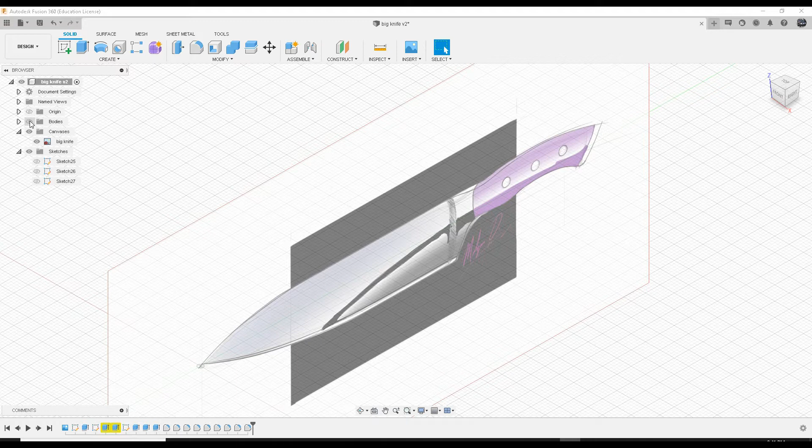Sketch it out, let's take out the bodies. Okay, so this is the sketch, right? And all I did was do one view, and we're just gonna do a simple knife.

It's not gonna be all super complicated or whatever. Let's get started. I have the sketch here. I brought it in, calibrated to roughly the size of the knife in real life, which is about 14 inches long. I memorized most of the dimensions, so we're just going to do a rough version.

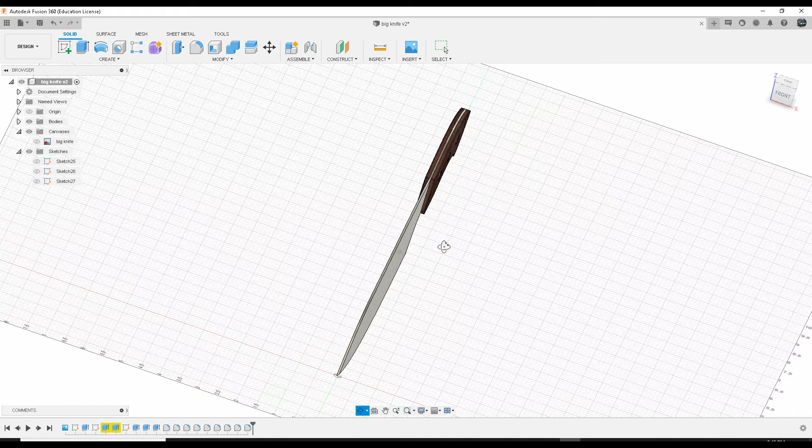Let's get the bodies in. So this is what it looks like without the sketch behind it. You see, you got wood grain, handle, and everything.

We're going to start from scratch. Now I'm going to show you how easy this is. All right, let's get the knife in here.

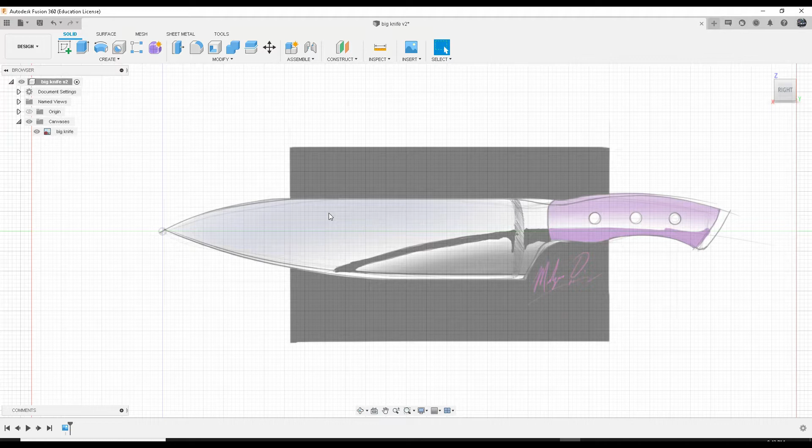First thing, if you notice, I have the start of the picture right at the origin of the grid. Create sketch - it's going to ask you to choose, select a plane or a planar face. We're going to choose this one since we're already in the right side view.

Going to go up here, give you plenty of options to choose from. We want to choose fit point spline.

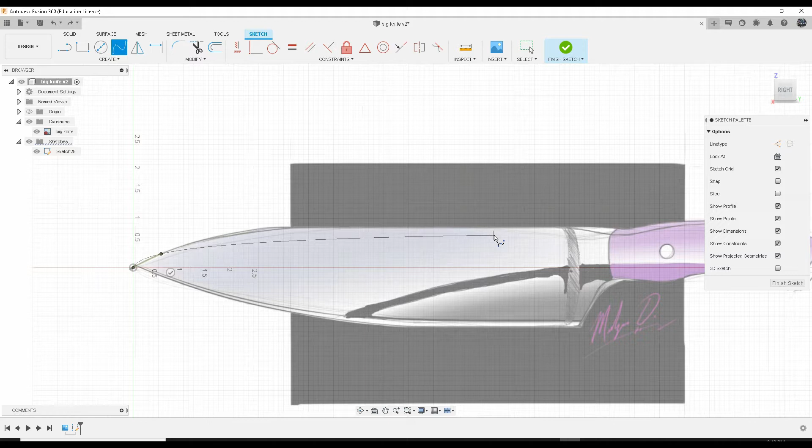Now, here's the thing. When you're creating a curve, you don't want to keep doing points. It's not going to make the sketch look good, honestly, if you do it like that. You want to simplify, keep it simple, right?

So what you want to do is just put the points at the arcs, like the highest and lowest points of the curves, or arc points, or what I like to call them. So with that, you just click along.

Using a Windows 10 computer, so my shortcuts and hotkeys are going to be according to my operating system. So left click, press enter.

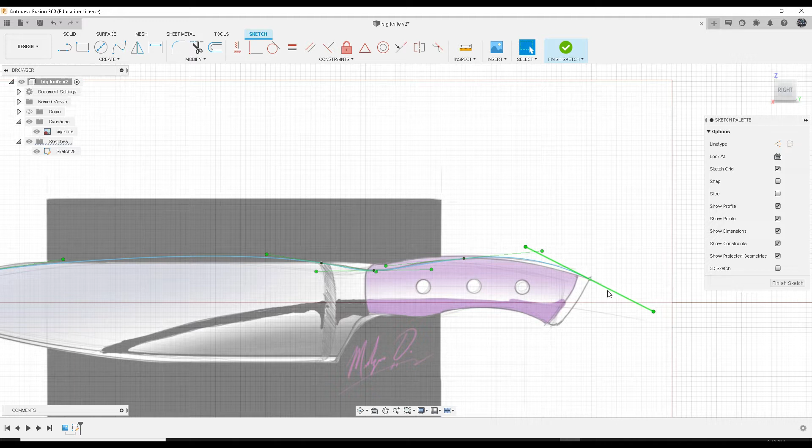Go ahead, click on each point and it will allow you to manipulate it. You have what's called curvature and tangent points too, and you see that pop up along with the curve. When you click on a point on the curve, it'll give you the option to manipulate it.

If you click on a point and press M on the keyboard, it'll give you the option to move it around and stuff like that. You'll see the drop down menu, and so on.

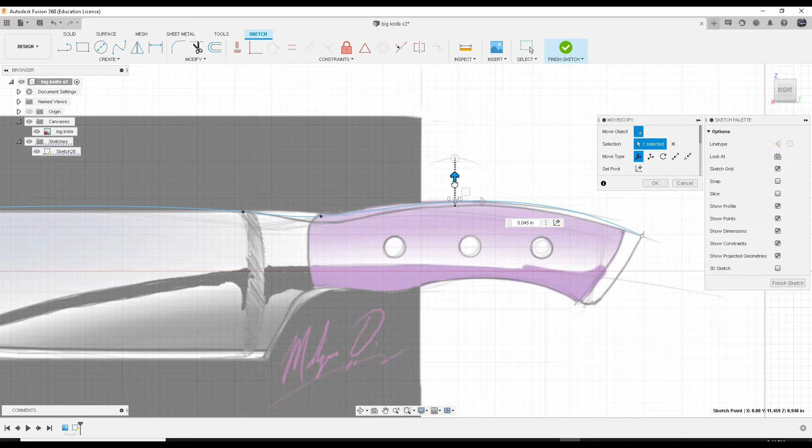So we're just going to get it close to the drawing. It's not going to be exact. We're not doing a CAD CAM type of deal where we're going to be machining this on a CNC or anything like that. We're just trying to keep it simple, get it straight to the point.

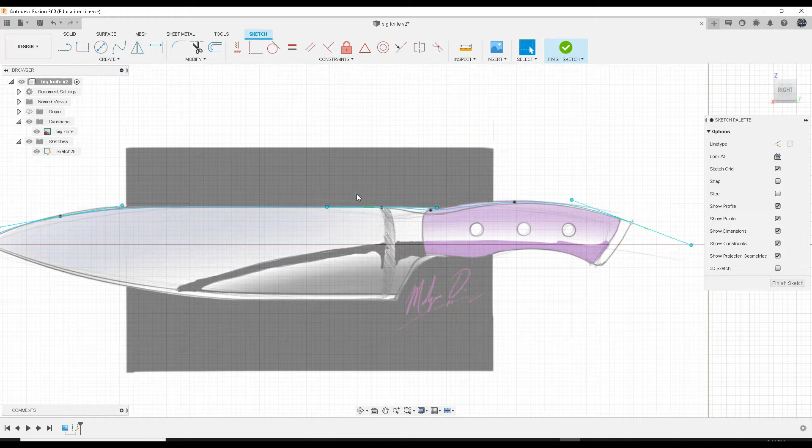All right, go ahead and press enter. Hopefully the storm outside, you can't hear it too well. Hopefully not, it's banging out there. So we're just going to keep going.

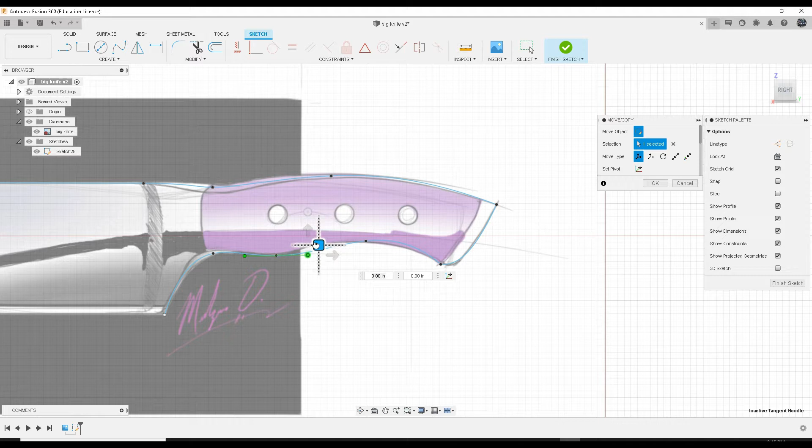You'll notice for a few moments I'll stop talking. All I'm doing is setting up the curves and keeping it simple, using the same principle I touched on a few moments ago. You want to minimize the amount of points you're using. It's going to make the object look better in the end. You'll see what I mean once we get this going a bit. This won't take long, I just need a few more minutes of your time here.

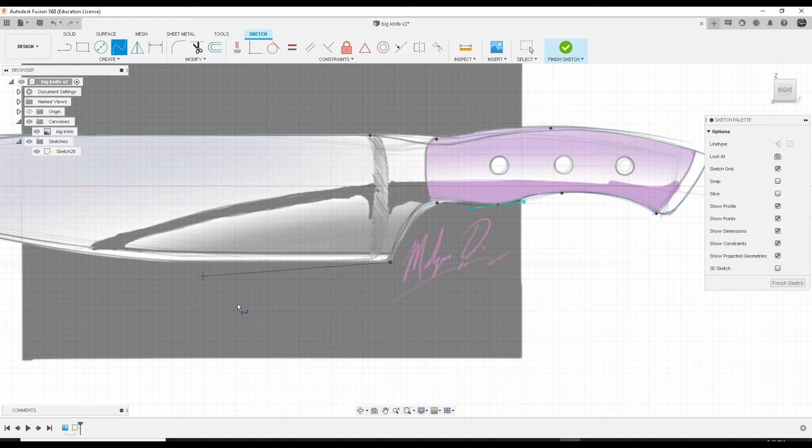There we go, press enter on the keyboard. Now what's going to happen, I'm going to show y'all something. You left click on a point to continue where you left off. You go to move it around, and what's going to end up happening is it's going to allow you to snap to the next point. It could be this one, this one, or this one, but we want to go to the end to establish the body.

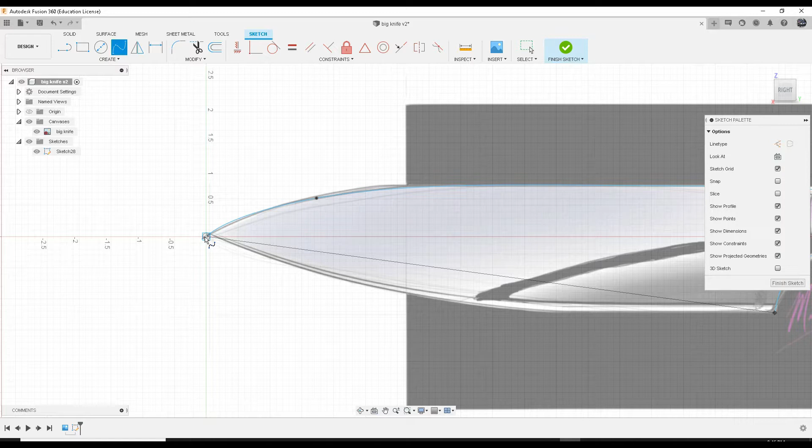I'm going to show y'all something. You hover over to that point, and it's going to kind of snap to it. It'll even drag you along the axis. Go ahead and snap to that origin, that's where we started. You can left click the green arrow, or just press enter. I'll just press enter, it's easier.

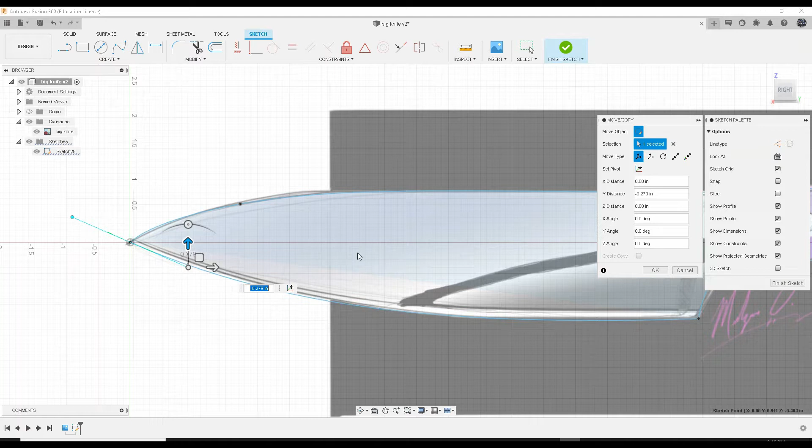The more you work with this, the more complicated your shapes and objects get, the more you'll want to use the hotkeys, because you don't want to keep clicking on the screen. It can get quite confusing.

So once you hit enter, you see if you hover over the object, it's going to turn blue. This lets you know you have a body. Go ahead, click finish sketch.

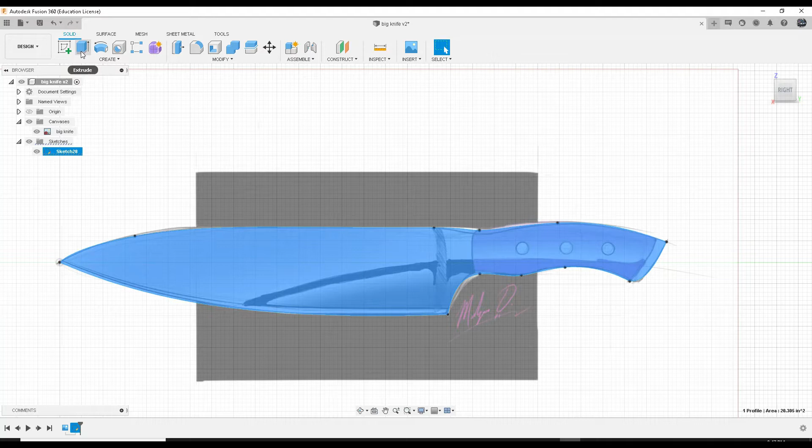Now we're going to establish a thickness. So you left click, go up to extrude, click it, go to isometric. You click the little house icon above the cube for the different views, and it's going to take you to isometric. So we want to establish the thickness for the blade, using rough measurements since we're not trying to put this on a CNC or anything like that.

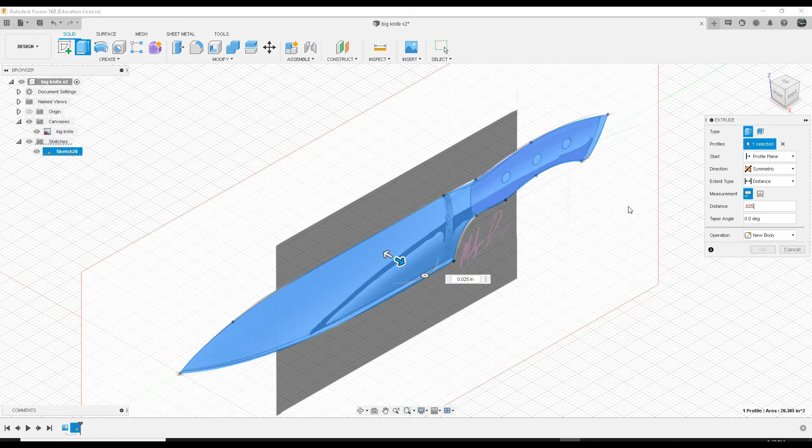Go to direction, click symmetric, go down to distance. You want to type in 0.025, 25 thousandths of an inch. Press enter. Boom, you have a new body. This is literally the thickness of the blade.

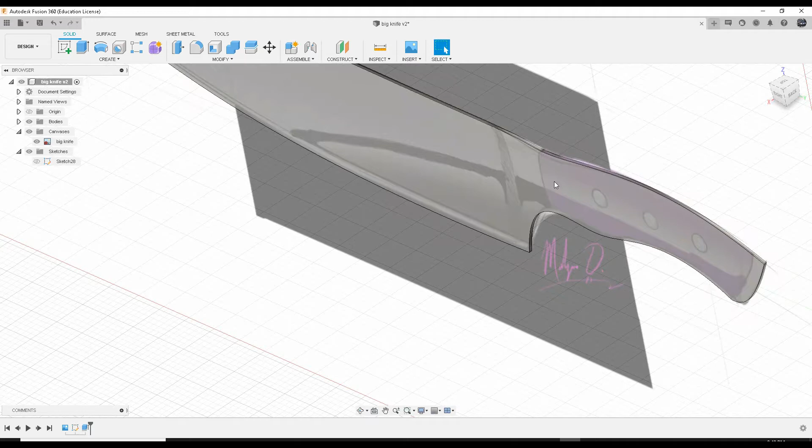Now what we're going to do, and I'm telling you, it's really this simple, we want to draw on the face of this body. When you create a body, it has different faces, so you've got one, two, even three here, and one on the other side. We're going to click on his face. So let's go back to right side view, click on his face, create sketch, and it's going to allow us to draw on his face.

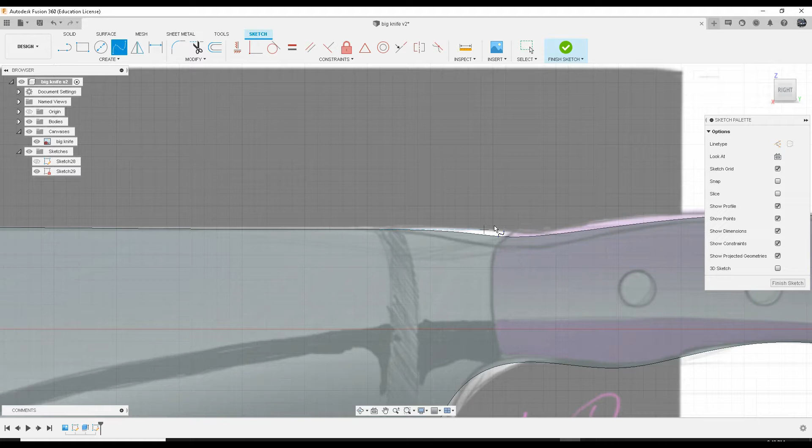Go to fit point spline. When you hover along the curve, it'll let you actually click on the curve. So you want to click there, go down, and it's going to snap right into it. Click, and then when you click again, same option, it's going to let you wiggle this around, confirm it, or you just hit enter.

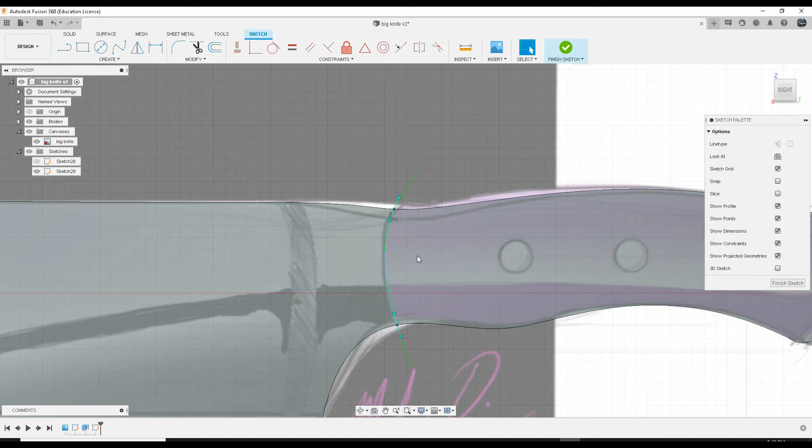Same thing, we're going to manipulate the curve, staying somewhat close to the picture. There, I drew it, press enter. Move this all along, there we go. Same, finish sketch. There you have it, so now you've created two faces on the same body. This is the handle we're working with, so we're going to translate this to the other side.

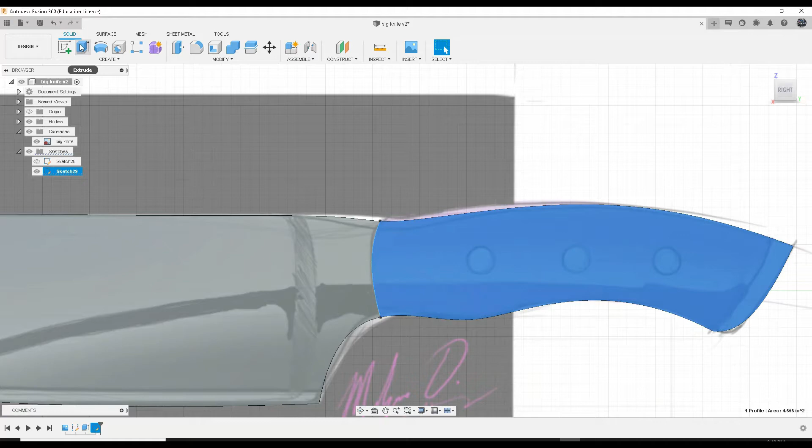So to translate it, what you want to do, well copy it to the other side. Click on this face, just left click it one time. Go to extrude, flip it around. And if you use this arrow to drag it, you kind of get it started, right?

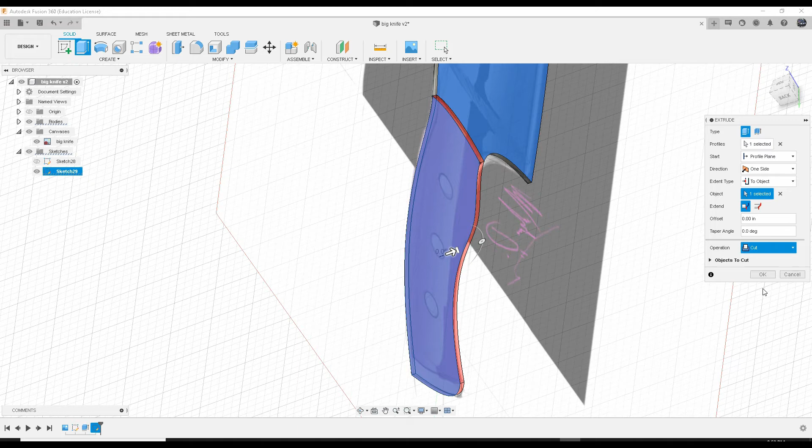It gives you an idea of direction and the direction it's trying to go. Now if you look, it's in red. That means it's trying to cut it. You don't want to cut it. We're going to establish the distance, extent type to object. Click on the object.

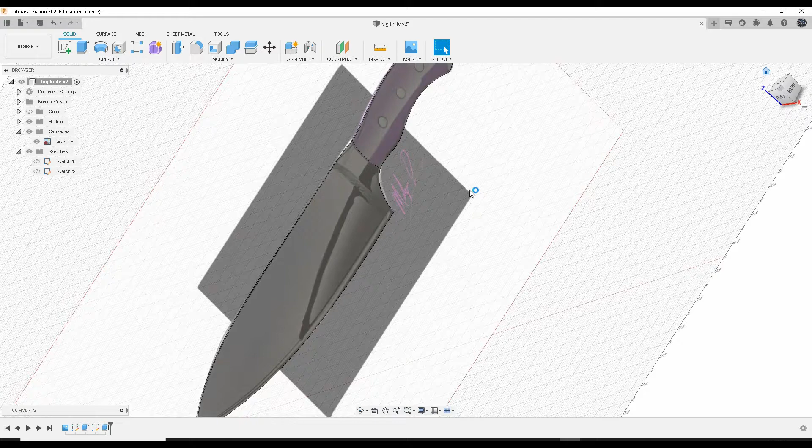Instead of cutting it, you want to go to operation, new body, press OK. That's simple. So now you've created the handle, you created its own entity, right? Now we need to focus on the handle, because we essentially got the body going on. We got the handle, the body, I mean the blade. So we're gonna make the blade invisible, because we don't need to work with it, not yet anyway.

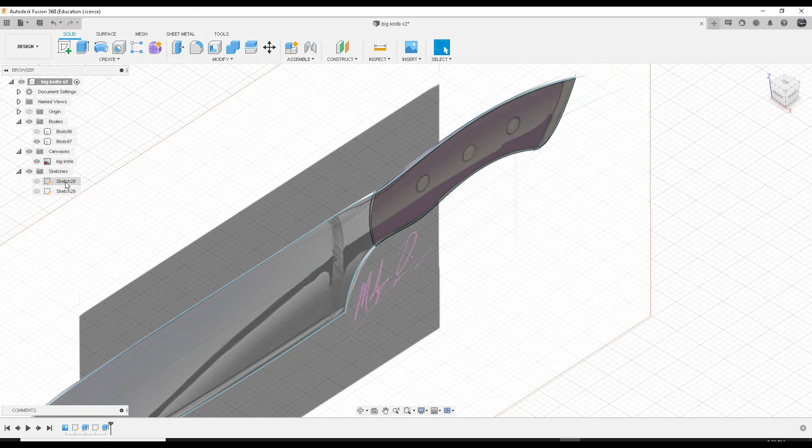So go to your menu, click down, we're going to click the little eye next to the body, and you see it's gone, right? Hell, you can even go as far as eliminating the picture for now, because again, we're just kind of focusing on this.

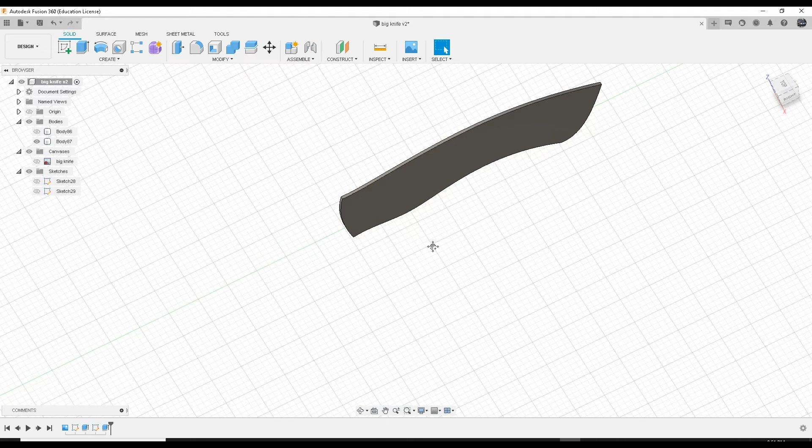So you want to extrude this face, because with a knife, and it depends on who's designing and making a knife, you go on YouTube, there's so many different ways to make a knife, but with a handle, that's more so what I was getting at with the handle.

Typically it was done two halves of material, whether it be like plastic or wood stock or something like that. They're taken and slapped on each side of the body for the handle, and pins are put in, like compression pins, super adhesive, whatever. I'll show you what I mean.

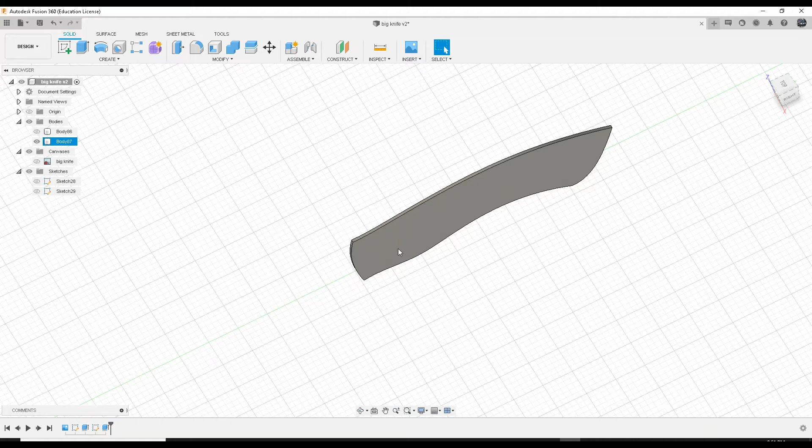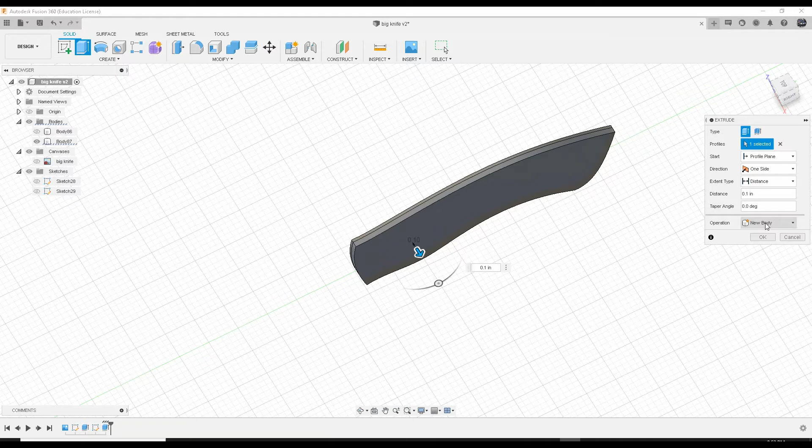So we're going to extrude this face. So you click on it one time, left click, extrude, 0.1 — again, rough measurement, I'm going from memory of the measurements I took from the actual knife. You want to go down to new body, make sure you click it, 0.1, press OK. We have half of the handle.

So same thing, just repeat the step. Left click, extrude, 0.1, new body, press OK. So you literally have both halves of the handle.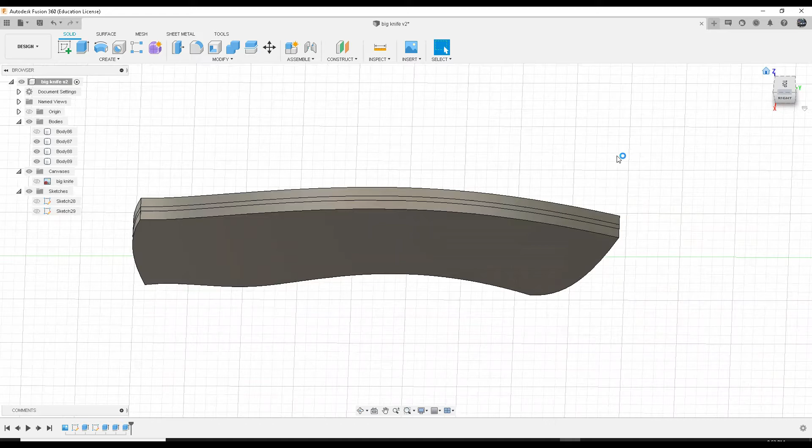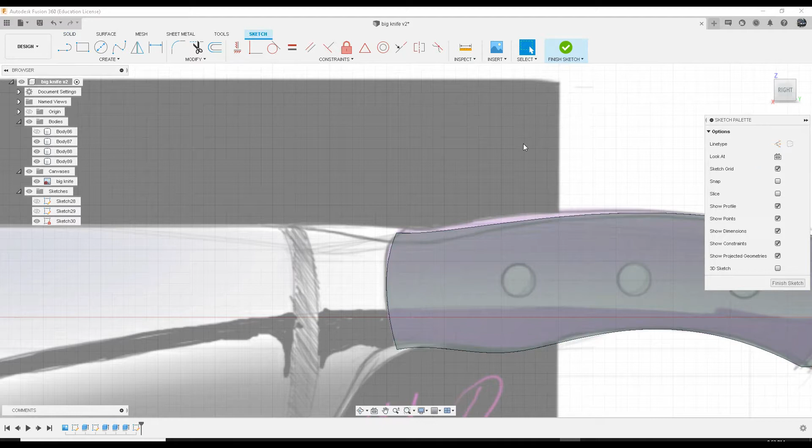Now let's bring the sketch back in, because now what we have to do is put in the pins that hold the two halves of the handle together to the body. So you click on this face, you create sketch, and we're going to draw a construction line. The whole point of this is to establish the center point for these three pins.

You can use a line or fit point spline. I'm just used to using the fit point, so we're going to do that. Try to find the center of the circles, drag it along, press enter. There you have it. So don't finish the sketch yet.

Don't click that, that's where you mess up. But make sure you turn off the construction line. Go to center diameter circle, click it.

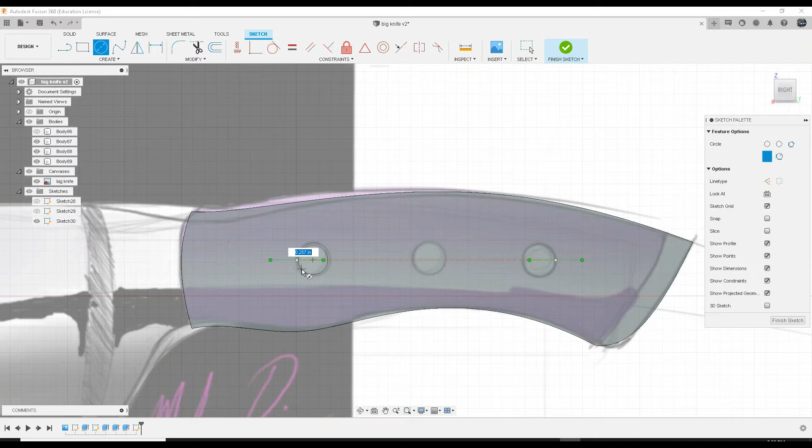And you see when you click it, since we didn't finish the sketch, we're working on the same plane and everything, right, the same surface. It allows you to drag your crosshair along this center line. And since we got this center line going for all three holes, roughly, click the center, try to find the center as close as you can, try to match it up with the drawing. In this case, we're going to type in 0.25, press enter.

Just keep doing the same thing. Same thing. Press enter. Now we want to finish the sketch.

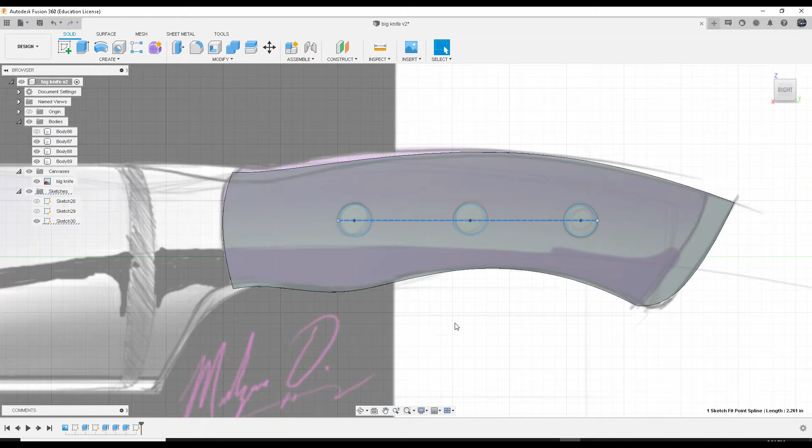We're done with it. Go ahead, click on the construction line, we don't need it anymore. Delete. Now we're going to project, or we're going to copy the drawings, the sketches for the pins onto the other side.

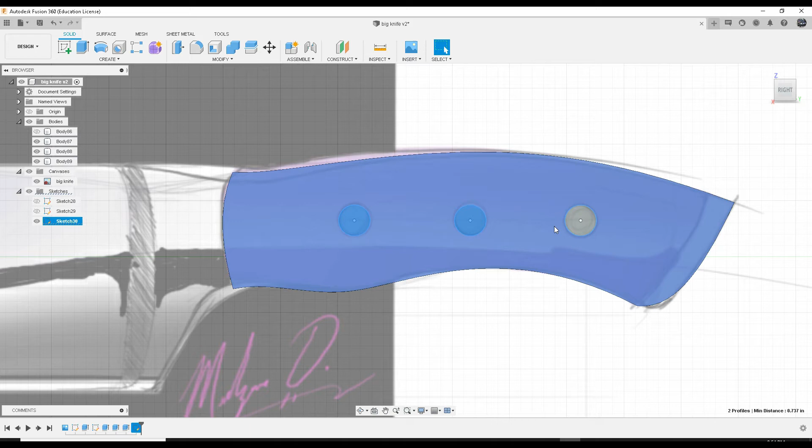The way to do that, you hold the shift key, left click on each diameter. You'll notice when it highlights blue, it's clickable. There it is. Now you flip it over to the other side, you just orbit it over, or you can see it highlighted at the bottom of the screen is orbiting.

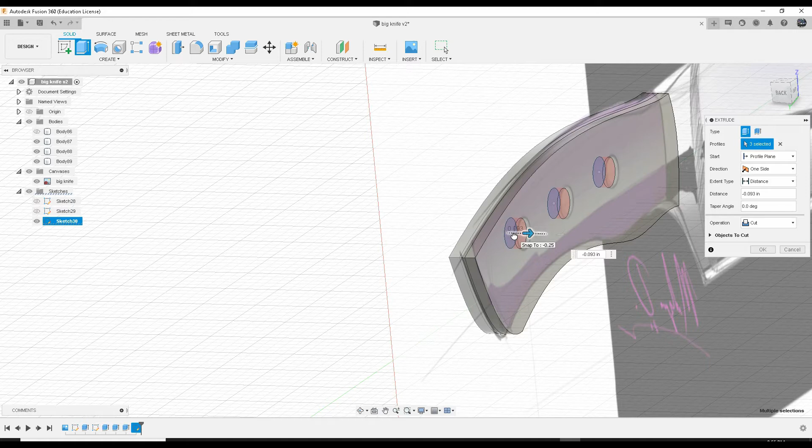And then extrude. Now you can choose that arrow through your object. It's kind of cool. Drag it through roughly, you're just giving it some direction.

Extent type, click on it to object, click on the other face. You don't want to cut it though, you want to create a new body. Press OK. There you have it.

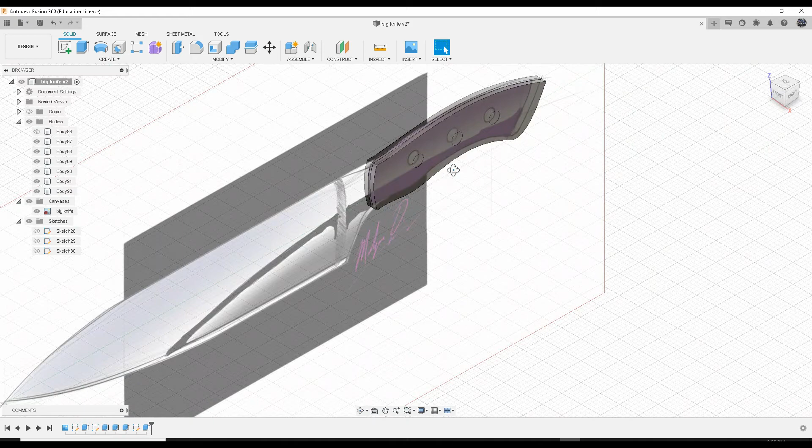It's that simple. I'm gonna show y'all something though. I'm gonna take away this drawing, and then I'm gonna take away this body too, so you can see. I'm gonna actually delete this body. Go ahead, delete that, we don't need it.

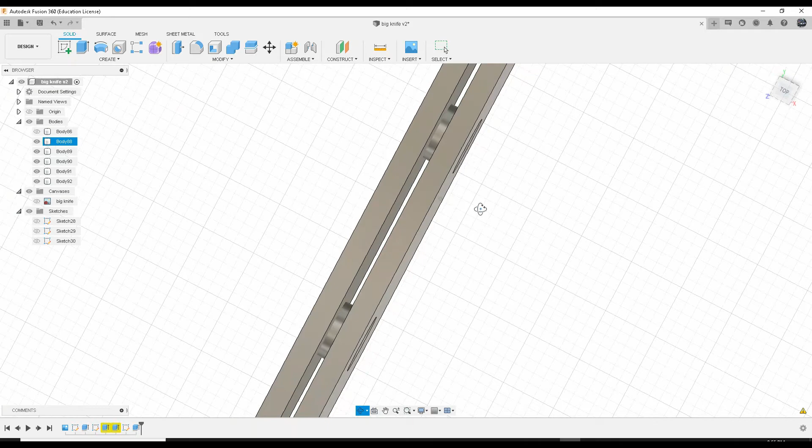Now if you look through, this is the cool part. You can see the pins. In real life, that's essentially how the handles, the two halves of the handle, are being held to the body.

I'm gonna bring in the original body. I'm gonna show y'all something. See that? So you see how you essentially have a knife. I mean, this is pretty much the knife, right? But we try to make it look good, try to make it look realistic, you know.

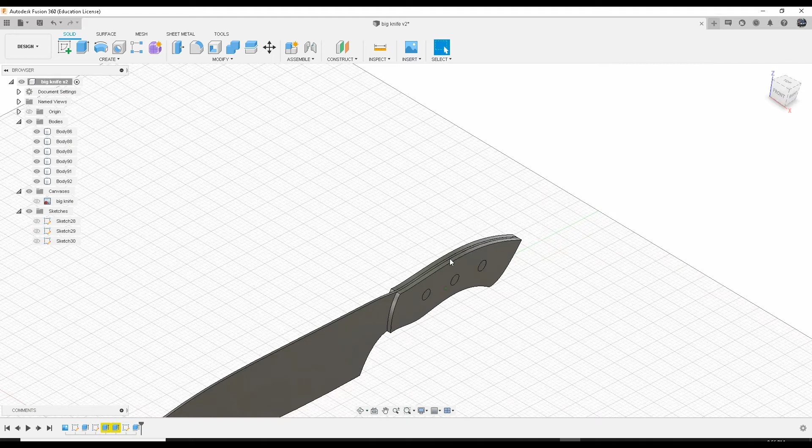So I'm gonna show y'all something. We're going to take out this body again, just making it visible because we're working with the handle right now. There's not much more we need to do to the blade itself, so we're gonna make the handles look good. I'm gonna show you how it's done.

So the pins, now again, depending on who's designing and actually making a knife, these pins that hold the two halves together to the knife, they might be flush with the face of the handle, or they might extrude a little bit. Since we're working in 3D, we're trying to give it some dimensions, so we want each one to extrude up just a little bit.

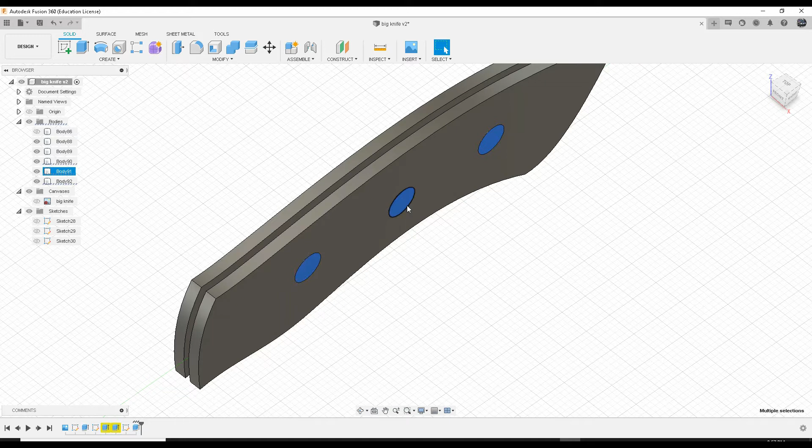Boom, okay, all right. So I did the same method: hold the shift key, click each one, extrude. We want to go this way. We're going to type in 0.005. Operation, new body. Press OK.

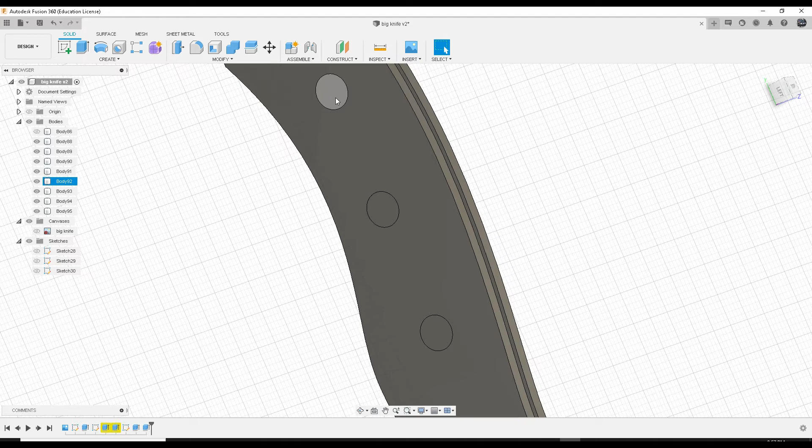I'm going to show y'all why I did that. We're going to do the same thing over here. Extrude, same thing, 0.005, 5,000ths of an inch. New body, press OK. There you have it.

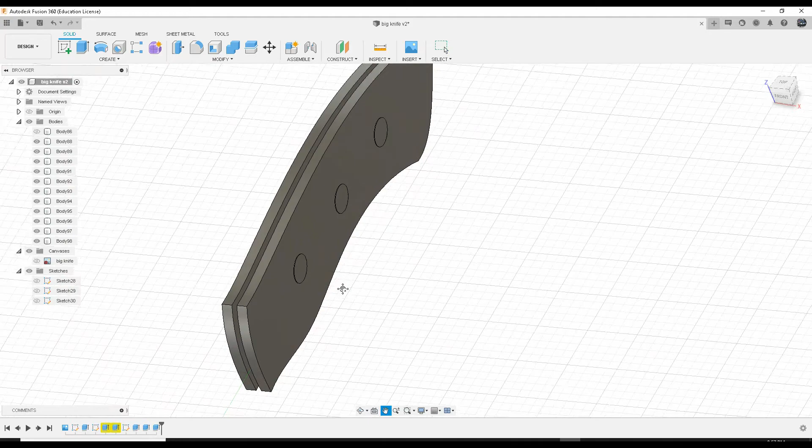Now we have the pins, and you see they going through still, right? Now I'll show you why I did that.

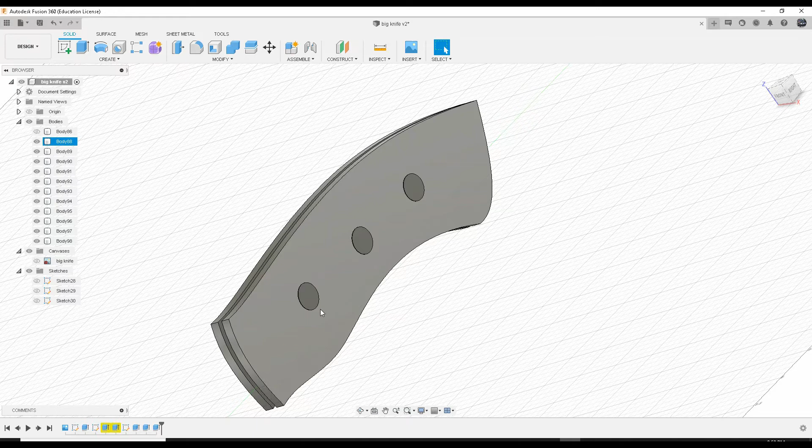We're going to change the appearance of the handle. We're going to do that now. And then we're going to round out these edges because we want the knife to be safe to handle. We don't want it to be uncomfortable in your hand. It's supposed to feel good when you're cutting things. Again, we want it to be, you know, pretty realistic, right?

So right click on the face, left click appearance. You see I have some materials preloaded, right? You want to make sure bodies, components is selected. I like mahogany. If you come down here, it'll give you some different materials to work with. To make it look real, I'm just using wood and it'll give you a few options here.

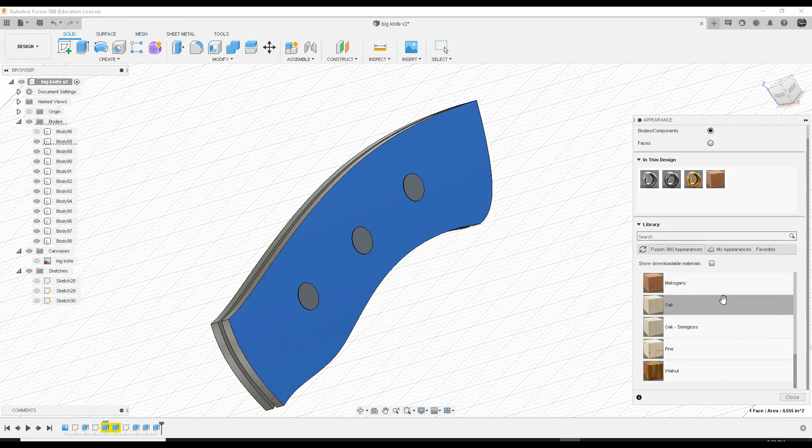Cherry is nice. Mahogany, I like that color. Walnut, you know, I like a nice dark color, gives it some dimension. We're going to stick with mahogany.

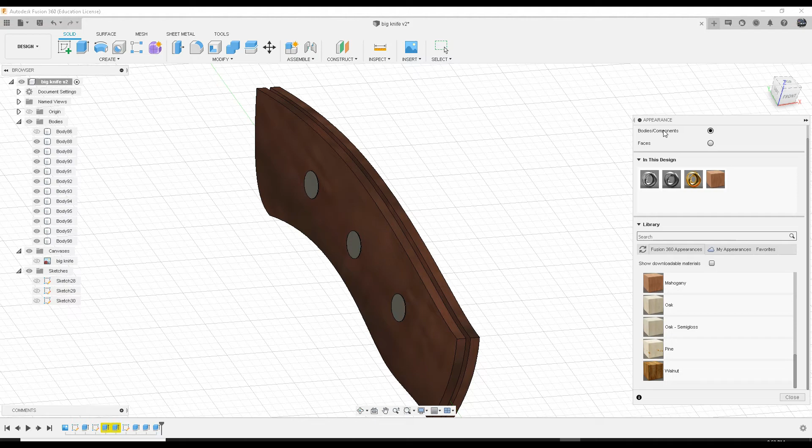See how that looks? Now you can actually choose the whole body too, just like that. And you do the same thing over here. You left click and drag it, hold it, drag it along, click, do the whole body. There you have it, all right.

Click close. Now we're still focusing on the handles, we'll get to the blade later. We got a little work to do with the blade, literally a little work, but most of the work is with the handle because we're trying to soften the edges. To do that, we'll add fillets, fillet radiuses.

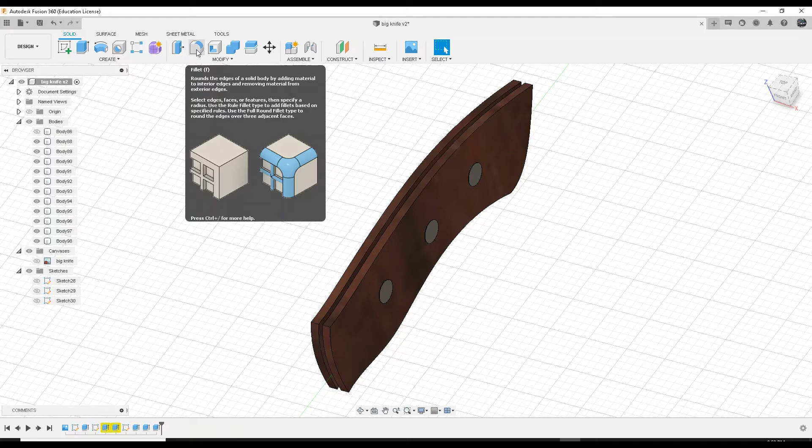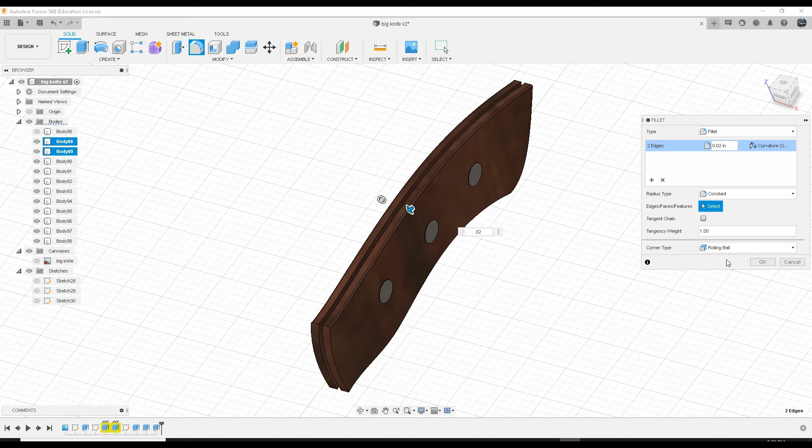All right, go ahead, left click fillet at the top. Hold down the shift key, click this edge, and click this edge. We're going to give it a 20 thousandths of an inch radius, 0.02. Go up to here, this option, curvature. Turn off tangent chain, leave in rolling ball. Press OK. There it is.

You look around, now we soften the edge a little bit. We do the same thing here: fillet, curvature, 20 thou, same thing. You want to do it under here too.

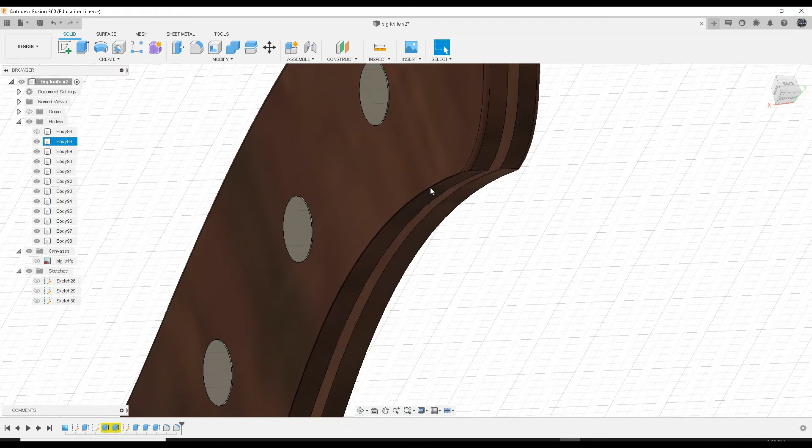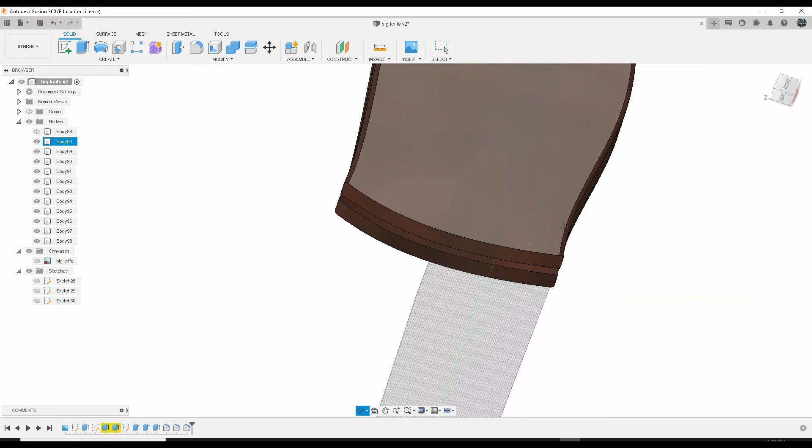Click it, fillet, .02 curvature, rolling ball, confirm. Same thing here, try and get it to look nice too. There it is, all right.

Got a few more edges to actually relieve that. Yeah, we could do that. Here, we can do these two.

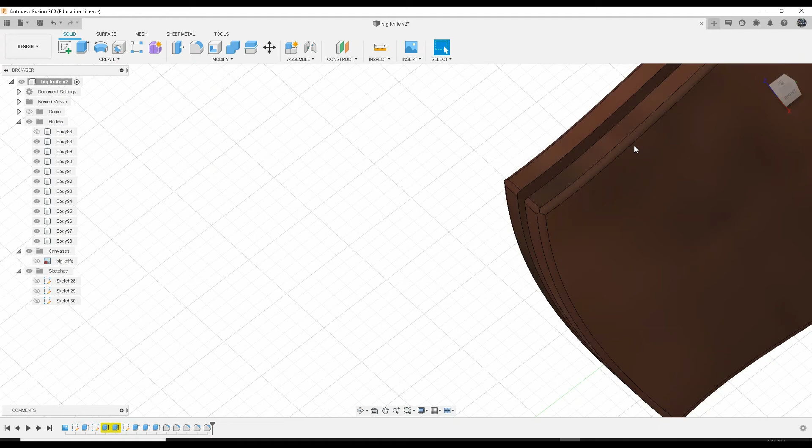All right, there you go. Now I'm gonna bring the body back, just make it visible again. And you see it's coming together.

I told you it's gonna be easy. So you go to this edge. The reason I brought the body back was because it was cohesive with the handles, the two halves of the handle that we did.

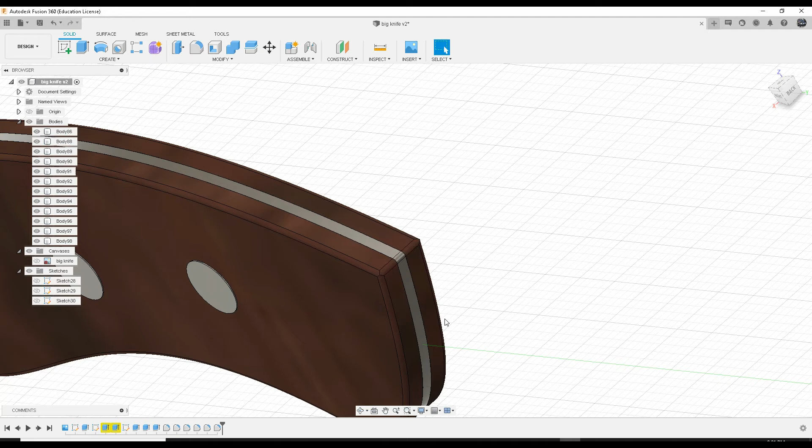So now you want to click all of them, fillet, same thing. Boom. Make it comfortable and safe to handle. No pun intended. Okay, maybe pun intended. Curvature.

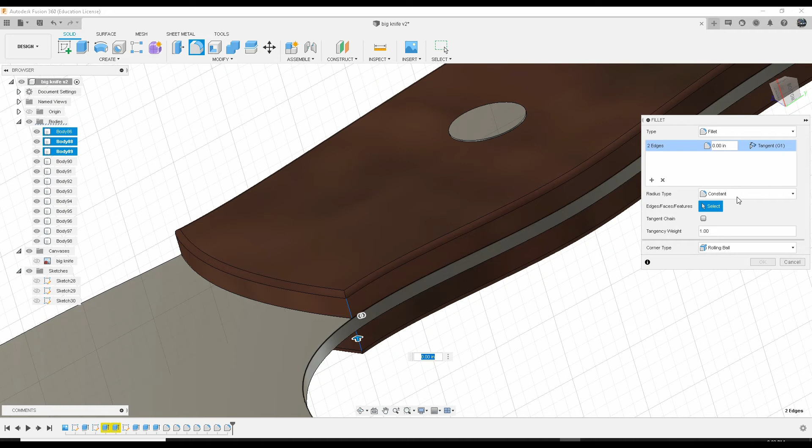20 thou. All right, here we go. Now it's looking like something. That's the knife I showed you all at the beginning of the video.

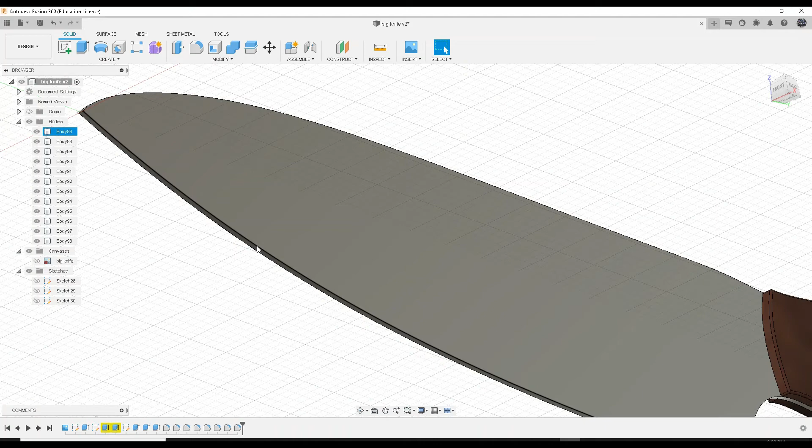Look at that. Now, last up. Second to last maybe. We need to establish an edge for the blade. To do that, click on it. No need to hold the shift, we're not choosing multiple edges. I mean, you could, but I'm gonna show y'all why we're not going to.

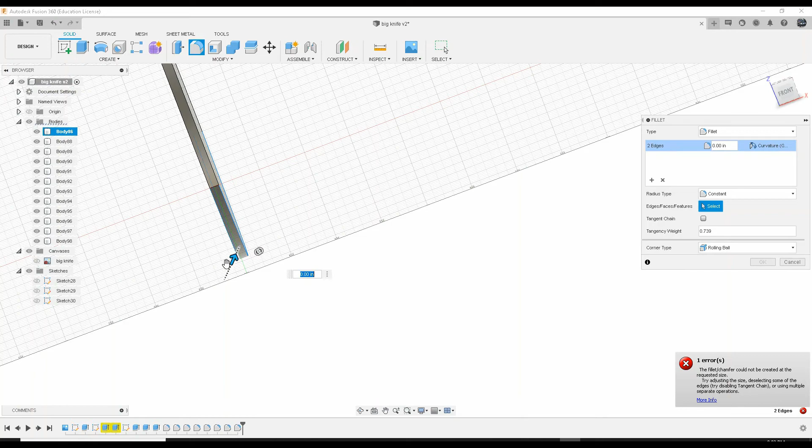See, so yeah, there's really no point. I'm gonna show you how I'm gonna do it. You just need the one edge, honestly. Because, in real life, only one side is going to be sharpened on a diamond wheel or whatever. You just select the one edge.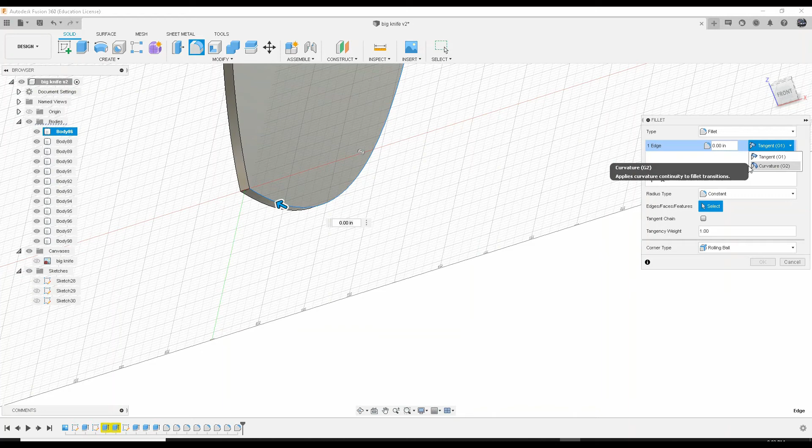Now with this, instead of entering a number, leave it tangent, right? You have to manipulate it with the arrow. Just grab it, pull it back. And if you look on the other side, see there was a line, you want to close that right there. So roughly 53 thou of an inch. Press OK, and there you have it.

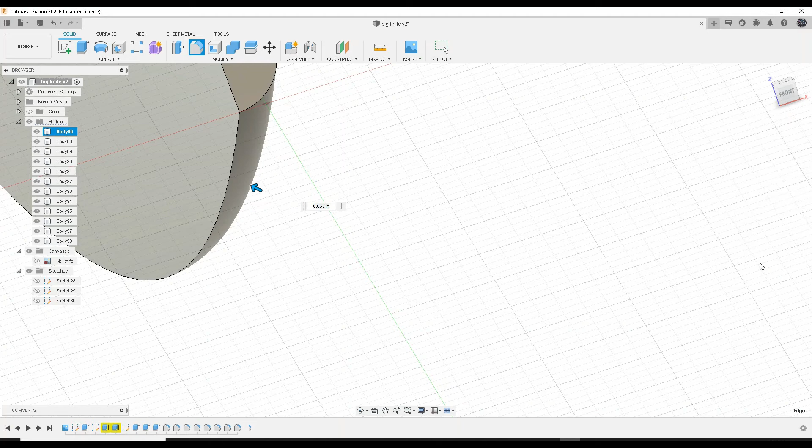You have an edge. Now you have a knife. So it's really that simple. Now, let's change the material of the knife.

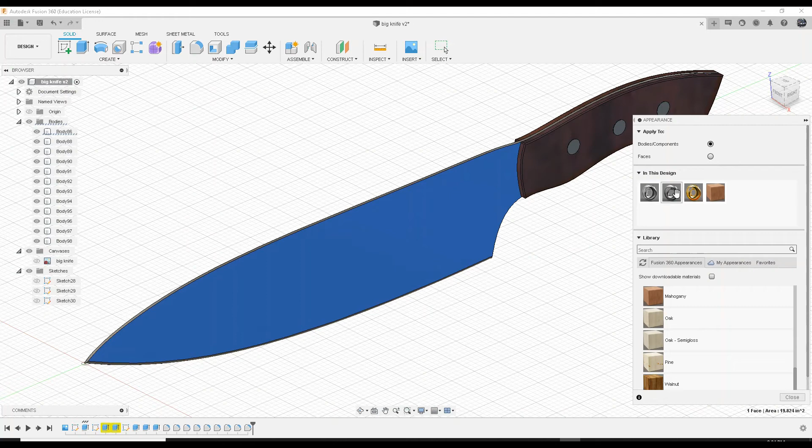I think right now it's like a default fusion material, probably like steel, satin steel, something like that. We're going with polished stainless steel. Brass, you could do brass. Brass looks nice, but brass is really soft and it doesn't make a good knife. You want something that's durable and rust resistant, and that's why stainless steel is usually the go-to.

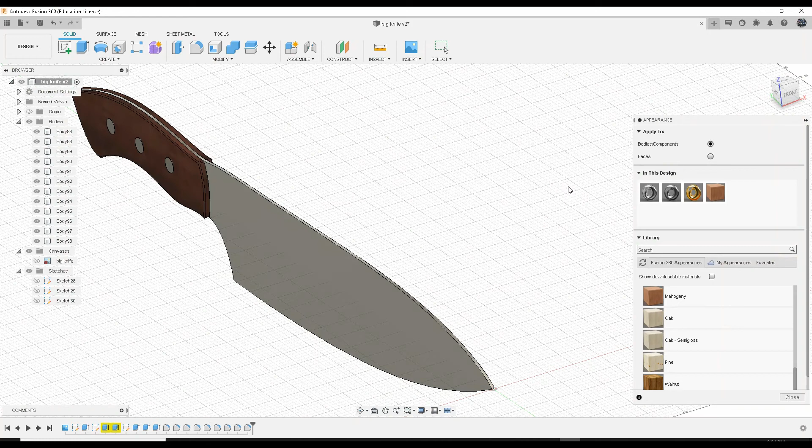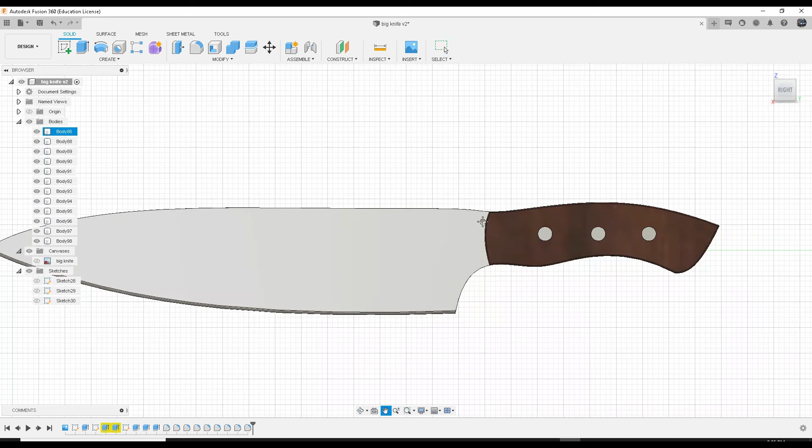Okay. Even the pins, stainless steel. I mean, you could do like brass pins, but again, there's no point. You might as well just do stainless. Stainless is rust resistant, not rust proof. Rust proof implies that it will never rust. It's not the case. Rust resistant, though, would be the correct terminology, whatever.

All right, here's our knife. Check it out, make sure it looks good. Using the orbit, just checking it out.

Now, here's the thing too. Right now, we're in orthographic. You could change the display style in the menu down below. You click on that little TV looking thing, like a computer screen, visual style, camera. Right now in orthographic, go to perspective, boom.

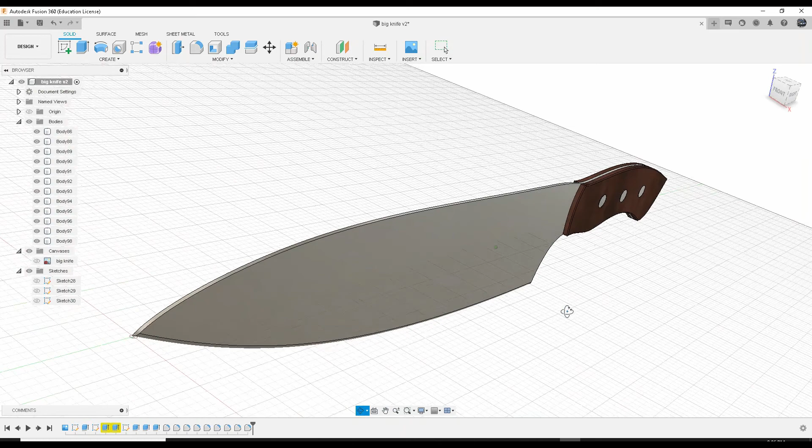Now it looks, that's how it looks in, this would be like what does it be, 2-point perspective? Yeah, I think it'll be 2-point perspective. So that's how it will look in real life. Boom, there you have it.

Make sure you save. Save as. Big knife. Save. There you go.